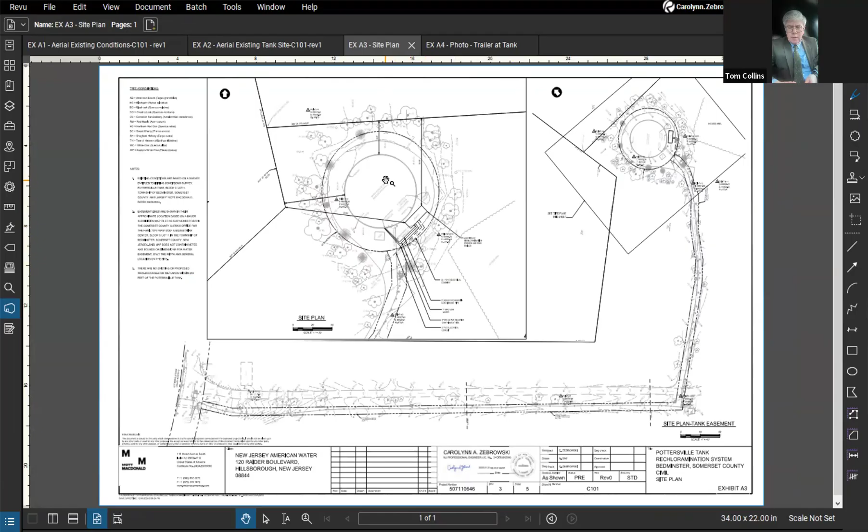So if we could move to the next exhibit, let's describe what is proposed here physically, and then we'll get to the purpose of the trailer. This is the site plan, part of the site plan set. Similar to what you saw on the aerial, we've got our existing storage tank and the trailer located within the easement down to the right here.

This trailer is for the booster chloramination of the water inside the tank. When water leaves the Raritan Millstone treatment plant, it's fed with chlorine and ammonia, which combine to become chloramine, providing disinfection and chlorine residual for the distribution system to prevent bacteria from growing in or adjacent to the water. As the water gets further from the treatment plant, the chlorine residual degrades. So the trailer has additional chemical inside that's meant to be injected into the water tank to boost that chlorine residual, maintaining a safe level throughout the distribution system.

So it basically replenishes what was put in at the Raritan Millstone plant when the raw water was treated. And by the time it gets here, the water company deems it necessary to give that a boost or replenish those particular elements. And what are the two chemicals that are used?

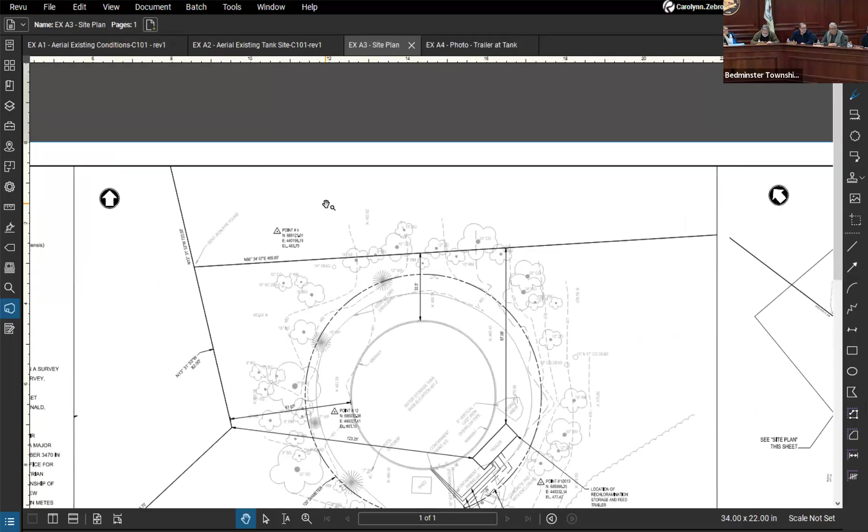So what property line are you speaking about? What's on the other side of that property line? The adjacent property is wooded. It's wooded, and is it still part of Hamilton Farms, or is it somebody's personal property?

So that's this area right here. I believe this is owned privately. It's private property? Yes. That would be literally right here.

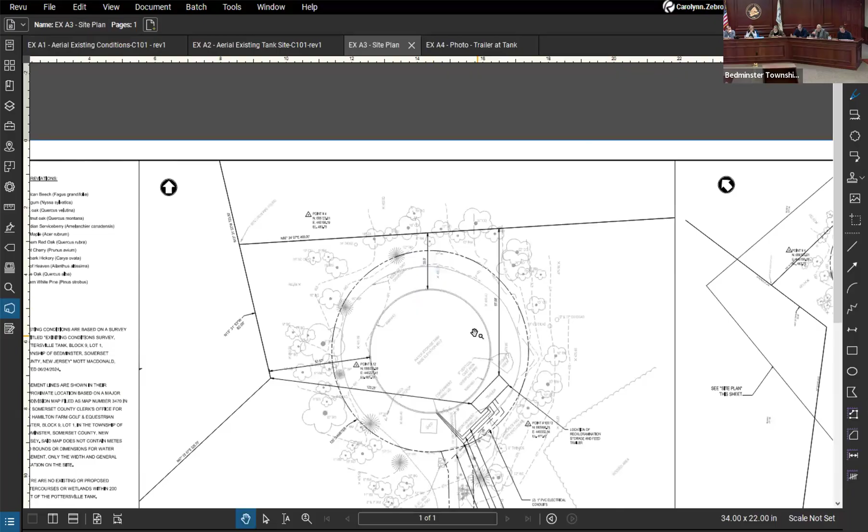Was this tank put in before Hamilton Farms became a golf club? Yes. Okay, I just wasn't understanding why a tank would be in a golf course, but it was done before. So it was mostly wooded area.

What would be a good location for a tank, Carol, in terms of elevations and in relation to the rest of the system? So tanks would typically be at some of the higher locations in the system, to minimize the height that the tank needs to be in order to store the amount of water that's necessary in there.

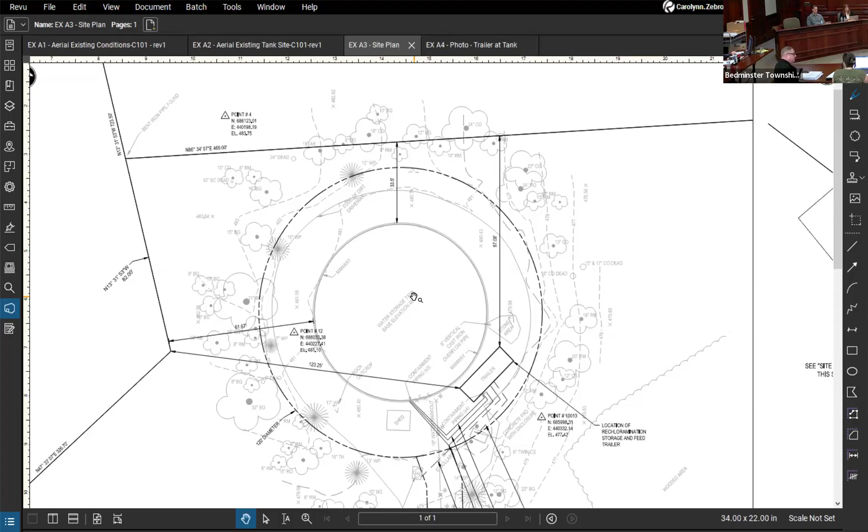And to let it basically flow back into the system by gravity. So the water company, Elizabethtown Water, would have picked a high point in the township, not necessarily concerned about the nature of the property, but more concerned with the elevation in terms of the rest of the system, correct. It creates water pressure. Yes.

Any issues with wetlands, stormwater, noise related to the tank? No, there are no wetlands in the vicinity.

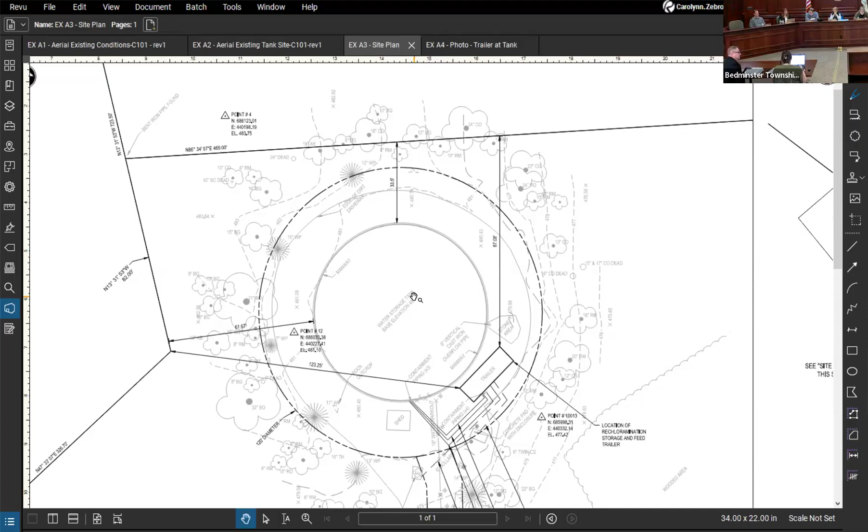The trailer will not provide any significant issues with stormwater. There is no noise coming from the trailer. The only mechanical equipment in there are some small pumps to pump the chemical into the tank.

We have a picture of the trailer, yes. Counselor, we've got a picture of the existing trailer on the site, which we're asking approval to retain. And the tank's right there behind it, right, Carolyn? Yes.

That should be marked as A4. A3, I think we're at... Oh, Counselor, sorry, A3. Yeah, we had those areas. The A1 is an aerial and A2 is an aerial, or what? The A2 is a closer-up aerial of the easement area and the location of the tank. A1 was the general area, an aerial showing the entire golf course basically.

Last thing, Carolyn, there wouldn't be any point in putting landscaping around this or trying to pretty it up. It's all the way up back there in the woods, correct? Correct. It's pretty heavily wooded in this area, and I don't know if any trees would grow if you wanted to put them there. And it's pretty shaded. To get to take this photograph, you basically got to traverse a roadway that winds between the trees and leads from the roadway into the golf course and back up to the tank.